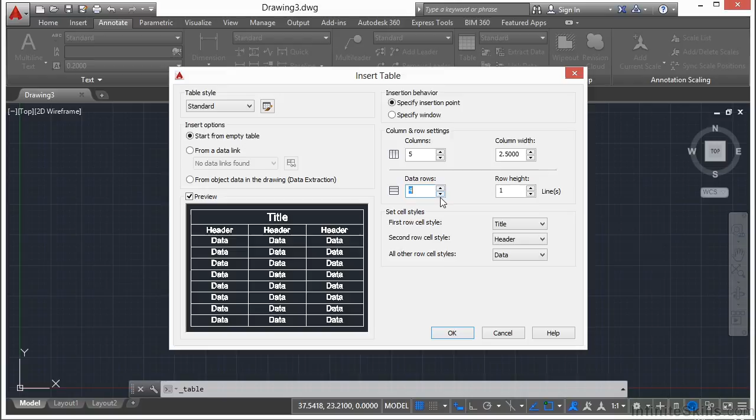You pick your table style, just like you would with a dimension, multi-leader, or text. You can click here to launch a table style dialog. This is one way to create a brand new style. Now, a style will have things defined in it, like headers and the text that goes in them. So once we've defined a few things like rows and columns, click OK, and then Insert. And then you just start typing it in. And it works just like it would in a spreadsheet.

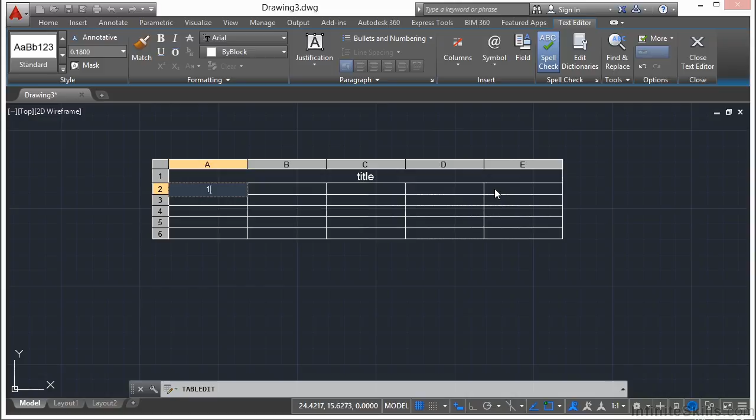So if you're familiar with working with a spreadsheet, you'll find tables very similar and very easy and simple to use. Now, they're nowhere near as powerful as a regular spreadsheet program is, of course not, but it gives you something that automatically grids your work, and it gives you different options similar to working in a spreadsheet. So for example, if I have numbers in here, number 1, I press enter, it goes down to the next one, 2, let's say 55, and then 17. When you're done editing the cells, just click anywhere else inside your drawing area.

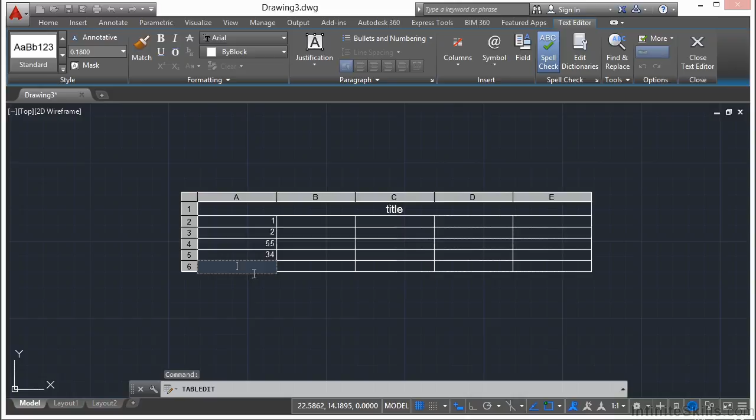Now, to select your table, you just pick any part of it, and you can have access to that there. So if I want to change this to, let's say, 34, I just start typing it in. Now I can select the cell, and if I double click in it, it gets me into a text editor similar to the multi-line text where I can work with this text. I can match properties, bold, underline, justification, etc. Now if I select this cell right here, I can go to data format and I can change some of the format, text, date, currency, etc.

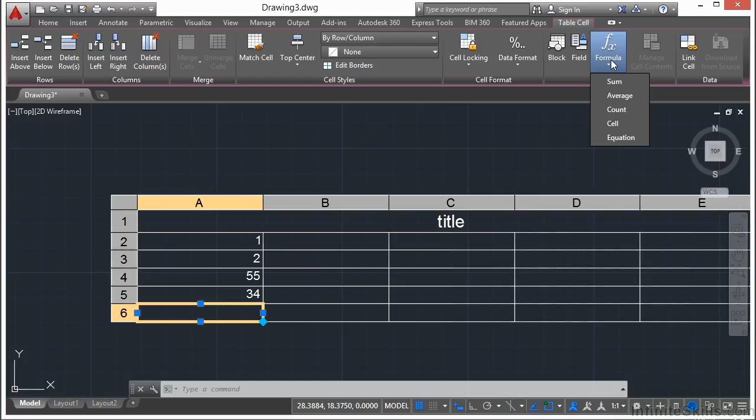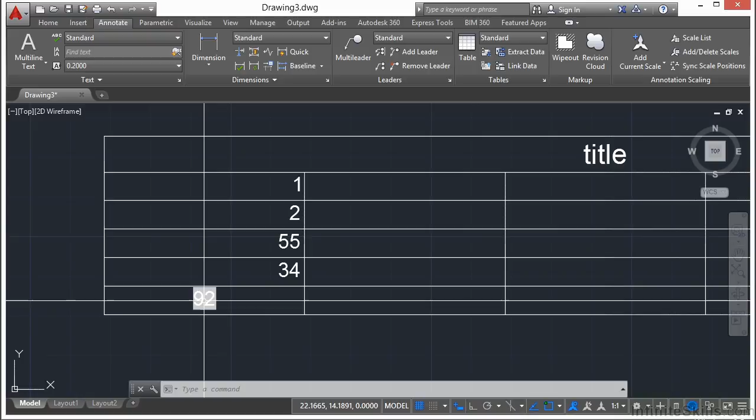Now I can also go to formula. So I can click on sum, and then I just pick with a selection window the cells that I want to sum. Looks just like a spreadsheet. Press enter, and there I have a sum. Now it puts a little gray box behind it. That just tells you it's a special field. That gray box won't print. That just lets you know that this is an automated feature, and if I change one of these values now from 1, make it very obvious, to 200, that's going to automatically update. So that's a really great feature to have right inside your AutoCAD file.

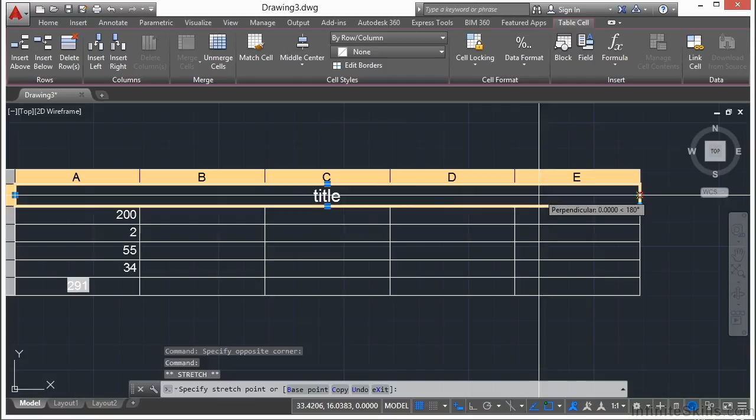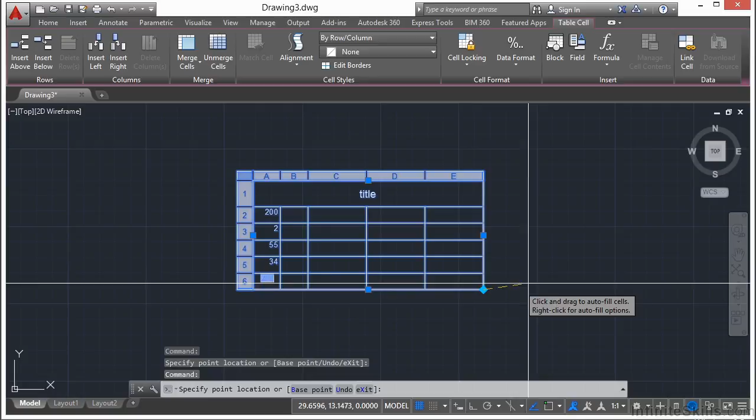You can manipulate your table with grips. So you can see here, you have a left, right, and some other tops and bottoms. Now the left and rights kind of act like stretches, and so does the up and down. If you click on the top of a column, you can stretch those different column widths. If I select this top box here, I pick everything, and then I can change the overall width or height. If I click here, it will automatically fill the cell, and that can get you into trouble sometimes, but a quick undo will set things back. So you can do things like that.

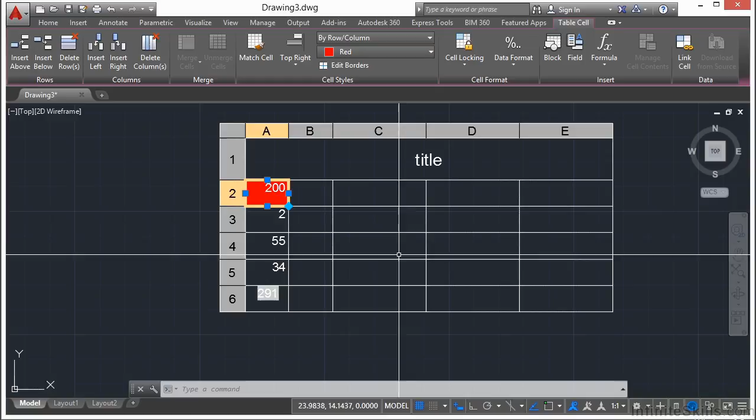If I pick a cell and I right click, I get a lot of my different options right here. I can change my cell style. I can change it to a data, a header, or a title. I can even save it as a new style if I'd like. I can set a background fill. And I can also do these things by selecting multiple cells at a time. Just hold your shift key and click where you want.

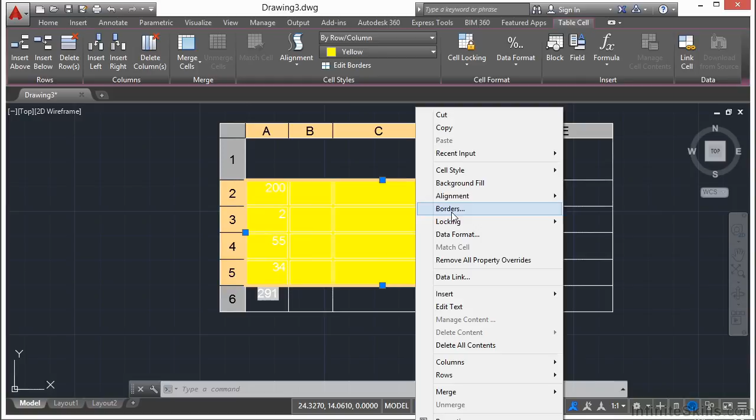Right click. You can change the borders. You can put in a double line, go all the way around. You can do that. You can right click again. You can change the background fill to something else. As you can see, that's very hard to see. Change it to black. I can also change my alignments. So there are a lot of different things that you can do with a table.

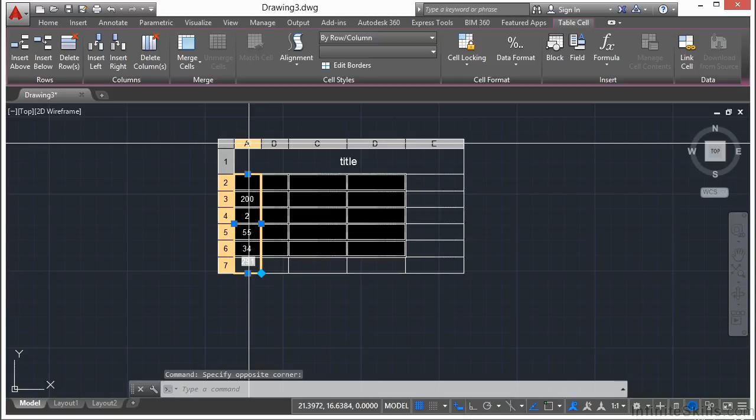If you need to add or delete rows, just select a row, right click, say delete row, or insert row below or above, and it adds it right to it, or it will take one away. Same way with columns. You can insert a column to the right or to the left, and so on. Now, if I pick two cells, I can merge them together. I can merge them all by row, whatever it is I want to do. So as you can see here, there's a lot of functionality in a table that works extremely similarly to a spreadsheet. So if you're familiar with working with spreadsheets, working with tables won't be a problem for you.